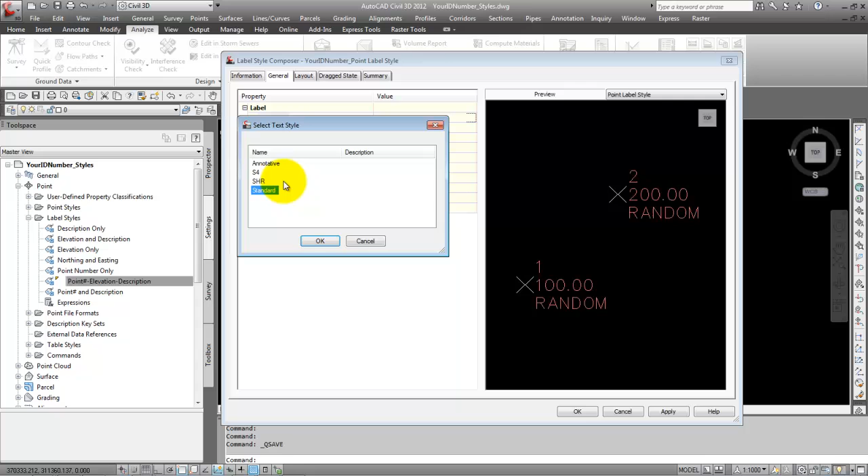Okay, give it that name, click apply, and let's click the general tab, and we can choose a text style to use. So if you have any special AutoCAD text styles, you can choose those from the list if you like, from the general tab.

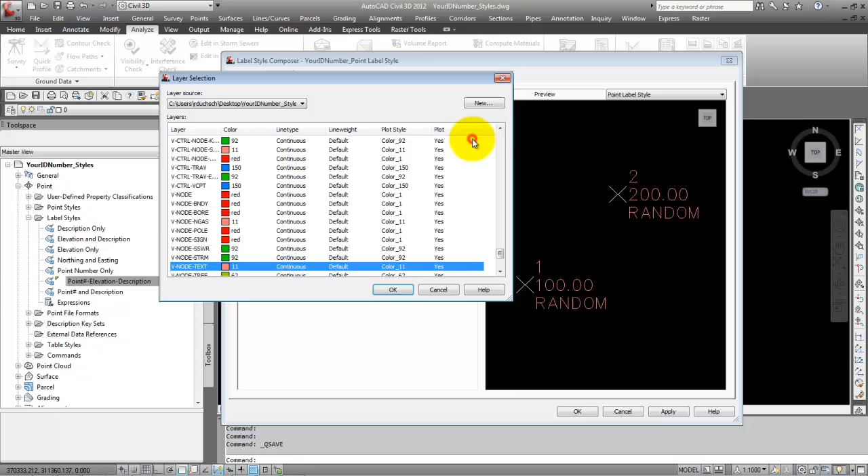Whether the label is visible or not, most likely you want to have it true, and what layer it's going to be on. So if it's ever opened up in AutoCAD, that layer will be on, in this case, on V-NODE-TEXT. And you can make layers right on the fly if you like, so you can select the layer, pick the button, and make a new layer if you want, right through that particular window.

Click the layout tab, and what you'll see here is this is typical with all label styles. We'll have a component name, and there may be a number of different components. In this particular style, we have 3 components: the description, the point number, and the elevation.

So I'm going to select point description now, and I'm going to change up some entities. You can change how it's anchored or how it's orientated by the anchor point. I'm going to focus on the text height, so I'm going to change the text height to 3, hit enter, and that'll change the description to 3 millimeters.

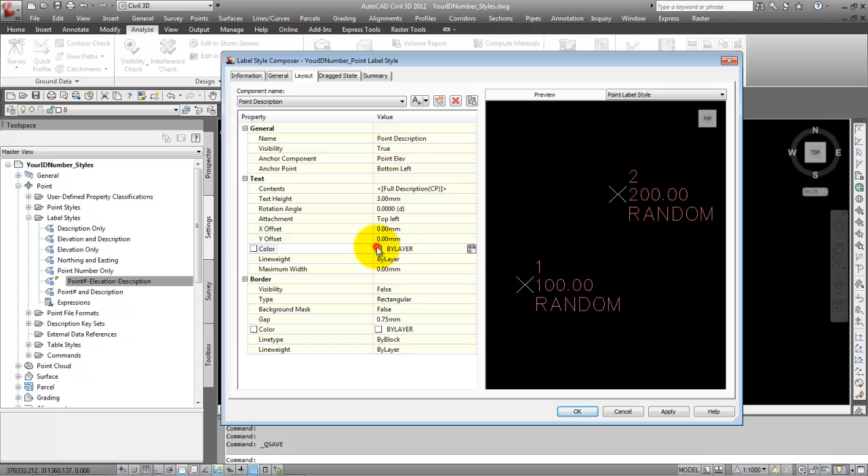And I'm going to change the color as well. So I'm going to click color, and change that color to dark blue. Now notice that just applies to the description, so if I wanted to apply it to the point number and the elevation as well, I'm going to have to click point number and make those same changes to the point number and the elevation.

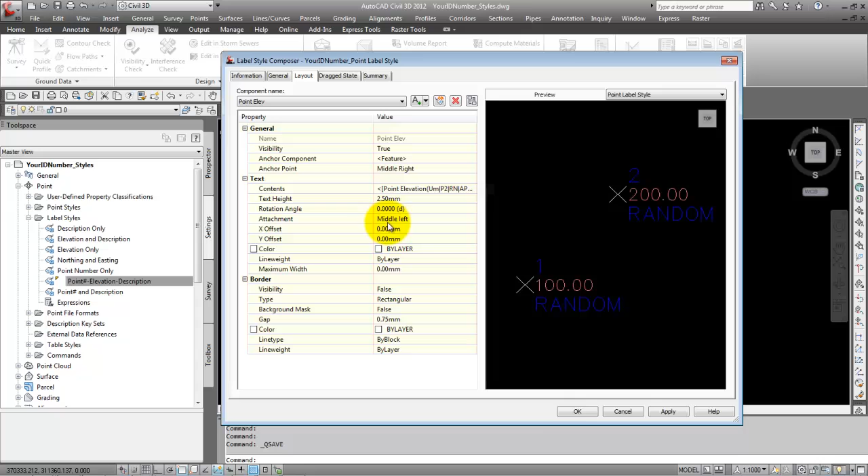Okay, so I'm going to do that to both. Lastly, my point elevation, change my color to blue. And now all 3 of my components are the same text height and color.

And if you like, you can place a border around it and all that other kind of fancy stuff. The drag state means what it's going to look like if you have to drag the label away from the point. So if there's some type of object that's obscuring the label, you can drag the label away and show how that's going to look.

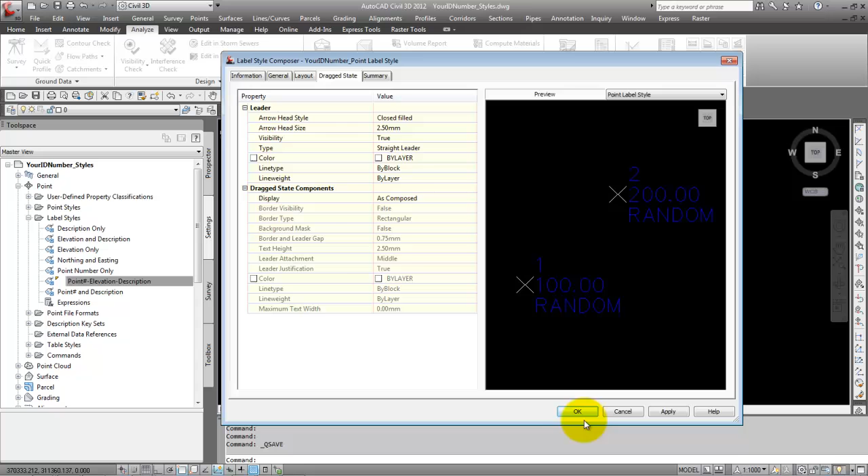I'm just going to leave that at the default now and show you what the drag state means. For instance, I'm going to create a point now, and you'll see that my ID number point label style has been created.

It's in the list. What I'm going to do now is expand out point styles and create a new point style. I'm going to right click on basic and go copy.

Just like I did with the point label style, I'm going to make a brand new point style based on an existing point style. So I'm going to call this your ID number, and you put in your own ID number point style. Now I have one point label style and a new point style. Click apply, then select the marker tab.

I'm going to change things up here a little bit, superimposing a circle with a cross on there. I'll click apply, and you have a few different options as far as the size goes.

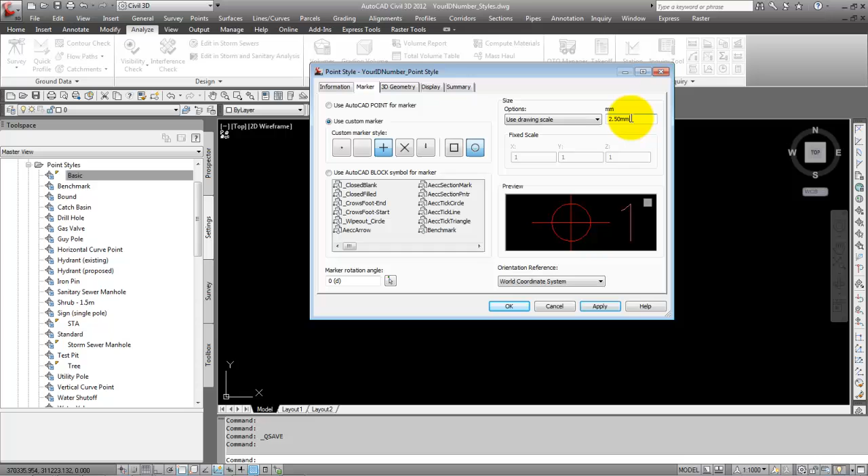You can use the drawing scale, which means that point will always be shown at 2.5 millimeters in your viewport, based on a 1 to 1000 scale set in your drawing settings. Or you can have a fixed scale or a size in absolute units, so in model space it's always going to be 2.5 meters.

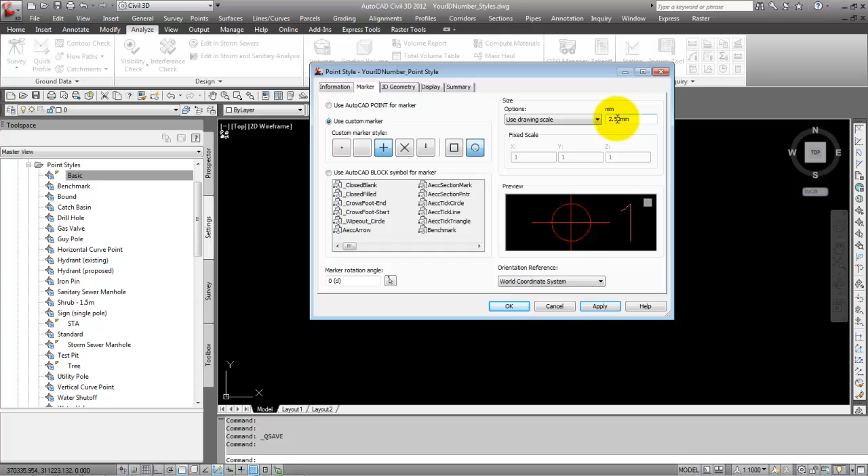I would suggest using the drawing scale, so you can be guaranteed that when the point is plotted, it's always going to be 2.5 millimeters high. Let's click the display tab and make sure both the marker and the label are going to be displayed on the correct layers you've chosen. Click apply and click OK.

So we have two new styles now, a new point style and a new point label style, but I want to set those as the default. Again, I'm going to right click in my settings tab on point and go edit feature settings, expand out point styles, and change the default point style for this drawing to your ID number point style. I'll change the point label style to your ID number point label style as well, and click apply, click OK.

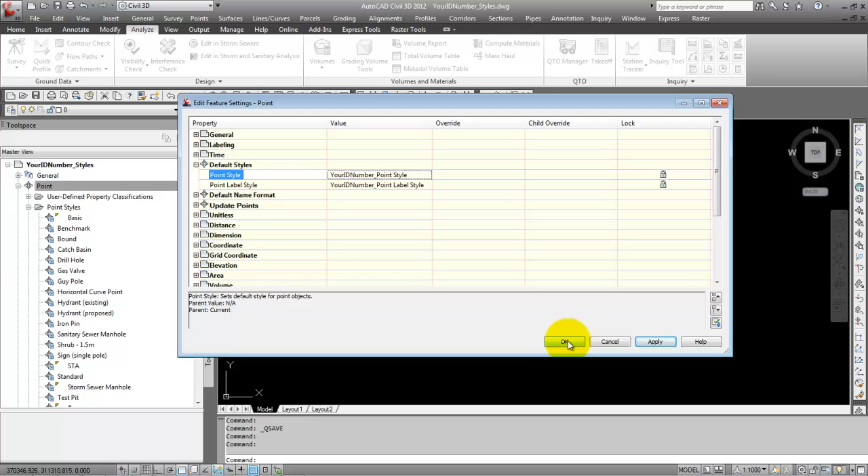The other thing you want to check is in your prospector tab, remember that all points go into the all points point group. So when I create a new point, it will automatically create an all points point group and place that point in that group.

So I'm going to click the points pull down, go to create points, miscellaneous, and select manual. I'll just pick a point anywhere on my screen and give it a description of new point—you can call it whatever you like—and give it an elevation. If you just hit enter, it won't apply an elevation.

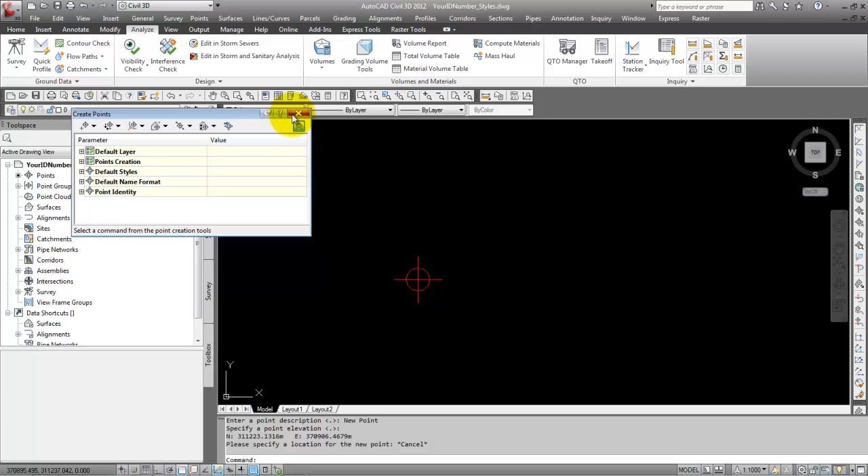All right, hit escape. So if you take a look, there's my new point style. Notice there's no label associated with it, but if you click the prospector tab and expand out point groups, you'll see an all points point group there, and in that group I have one point listed in my item view, so you can check out how it looks down there.

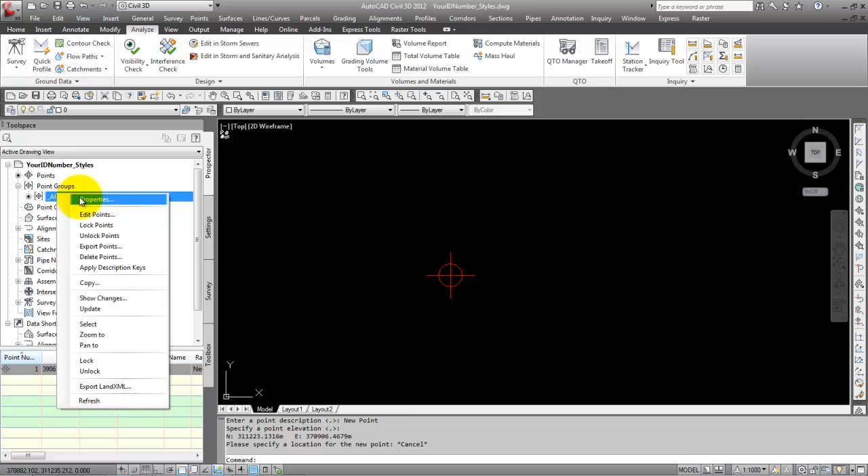Right click on the all points point group and go to properties, and from there you want to change the point label style to your ID number point label style. Click apply, click OK, and there's your new point.